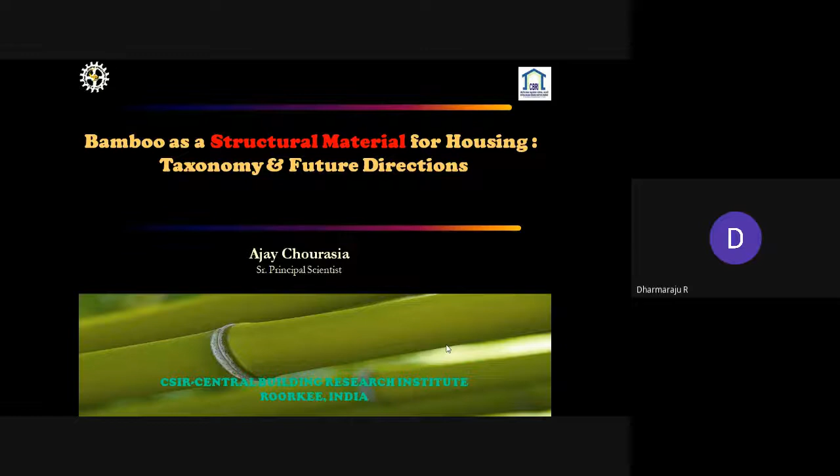So, it is my pleasant duty to discuss with you some of my experience regarding bamboo as a structural material for the housing sector, and I will be discussing its taxonomy and future directions. Because whenever discussing this kind of material, we have to think of scalability if we really want to promote this product in the housing sector.

Nowadays you must have heard a lot about different kinds of disasters happening all around the globe. During the rainy season you have drought, during heavy chilly weather conditions you have extremely hot weather, and wherever you expect a location is not subjected to rainfall or flooding, there you are finding flooding.

So these odd things are happening, and for that purpose expert groups all around the globe are focusing on climatic change. You must have come across the IPCC report of 2021, the Intergovernmental Panel on Climate Change. The first issue has been submitted and has quantified all these aspects, but they have not yet quantified or addressed how we can control these things and what measures need to be taken.

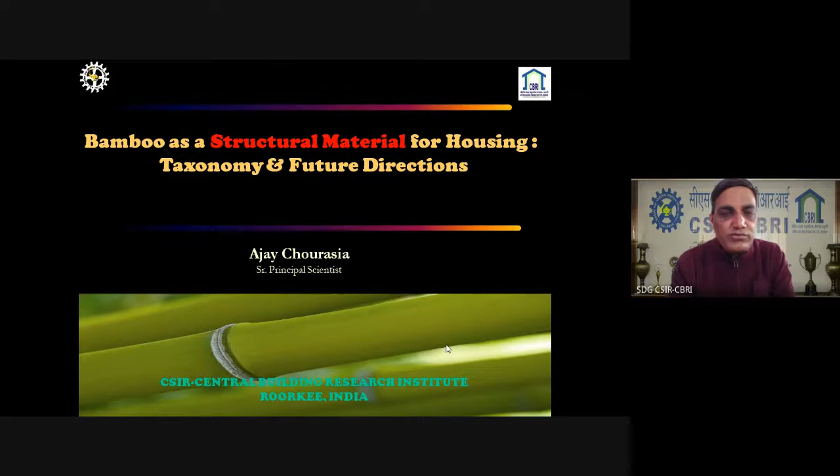In that context, this particular program is an ideal opportunity to bring to your notice that if we can promote bamboo, we can reduce the carbon footprint. At the same time we can generate a lot of economic and physical growth in day to day life, particularly helping the poorest of the poor people of our society.

As you know, bamboo is being widely used for different purposes. In the housing sector, it is being used as a complete building system or structural element like doors, panels, mats, or in the construction aspect it can be used as scaffold, and there are other different applications which are being widely used.

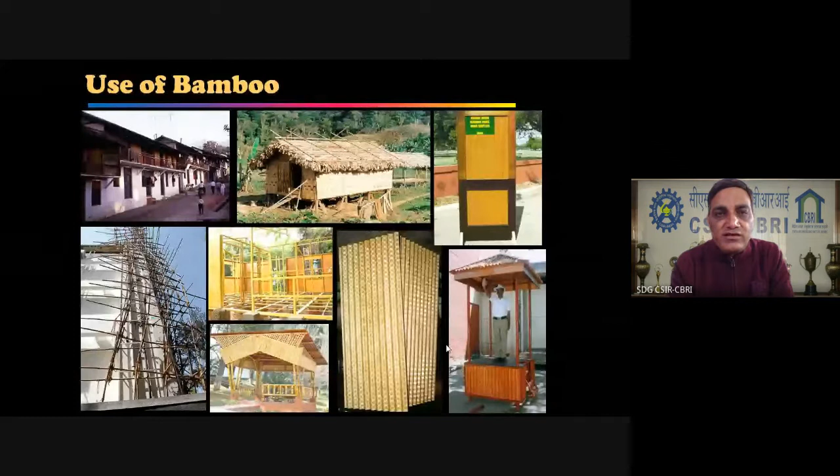But whatever we are using at the moment, we need to accelerate scalability, make it more scalable, and for that purpose we need to have a deeper understanding about this particular material so that we can take it to a higher level.

So before going into the structural aspect, I would like to draw your kind attention to the percentage of forest in our country, and how much contribution has been made by the forest in production of this bamboo.

We have 329 million hectares of land area, out of which 63.34 million hectares is notified as forest, which is around 19%. Among this 19%, 11% is dense forest, and the rest, 8.15%, is open forest and mangroves.

Out of this total 63.3 million hectares of land, 8.96 million hectares is basically utilized for production or cultivation of bamboo, in which around 67% is clump forms and 33% are non-clumping forms.

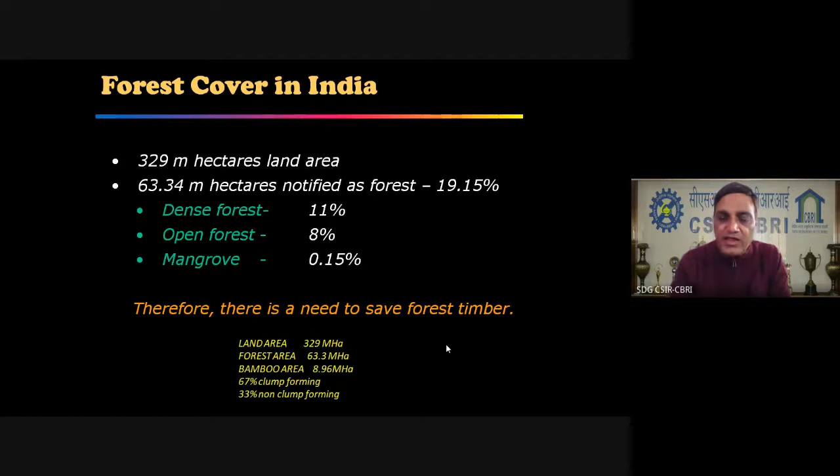Very good news is that India is the biggest producer of bamboo all around the globe, to the tune of around 45% across the globe.

Again, when you see bamboo, it basically addresses three major national concerns. First of all, ecological security. It not only conserves forest through timber substitution, but also can be used as an alternate material for non-biodegradable or high energy consuming materials like metals and plastics.

Apart from that, sustainable food security is also offered by means of bamboo, in which bamboo-based agroforestry systems can be promoted, which indirectly helps make the soil more fertile in and around the region. Apart from that, few people are consuming bamboo as pickle and for other purposes, so these are other food security benefits assured from bamboo.

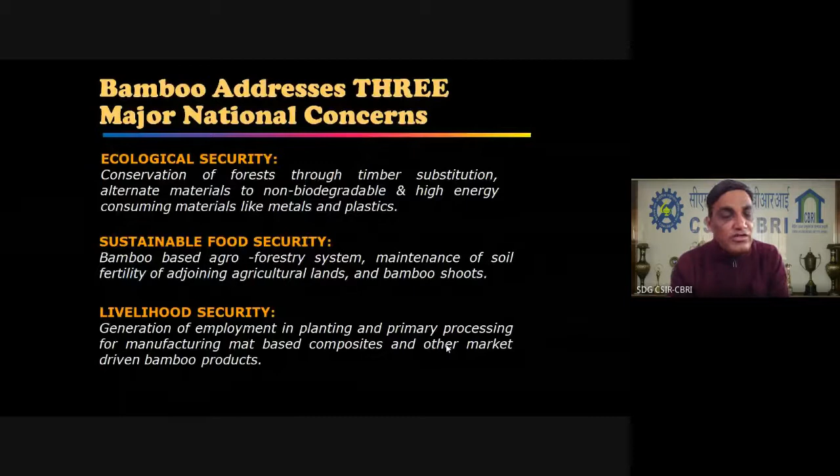When you talk about livelihood security, definitely when you are promoting the use of bamboo, you are developing more employment generation, basically in planting, primary processing, and manufacturing stages. So there are multi-manifold utilization benefits which you can gain out of bamboo.

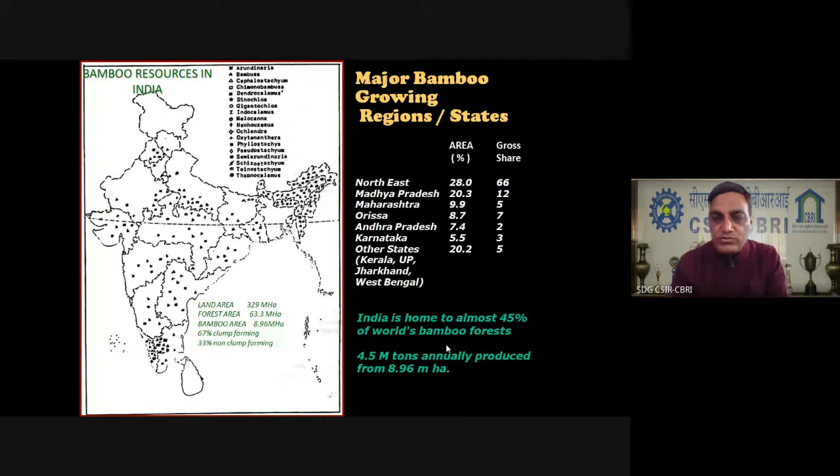As I mentioned earlier, India is home to almost 45% of world's bamboo production, in which 4.5 million tons are annually produced from 8.96 million hectares of land in our country. The seven sister states of Northeast have more contribution in production of bamboo, to the tune of 66% of total bamboo produced in our country.

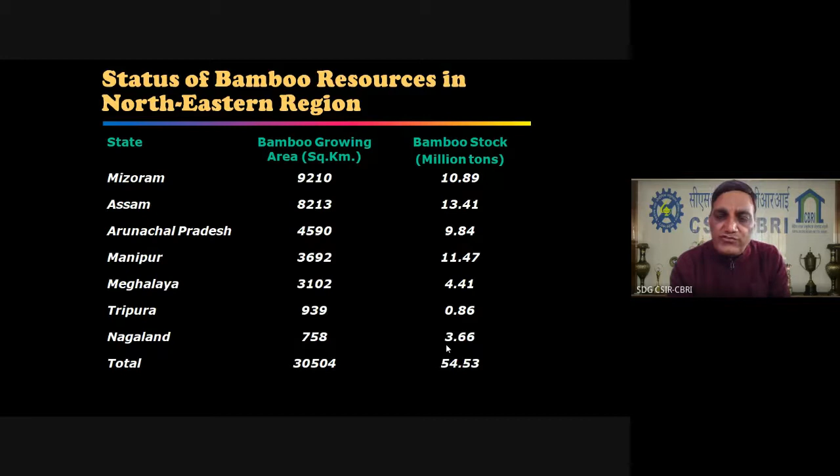When you see all these seven sister states, Assam, Mizoram, and Manipur are the leading states wherein the largest generation or cultivation of bamboo is happening. Importantly, good kinds of species are also being produced in these states.

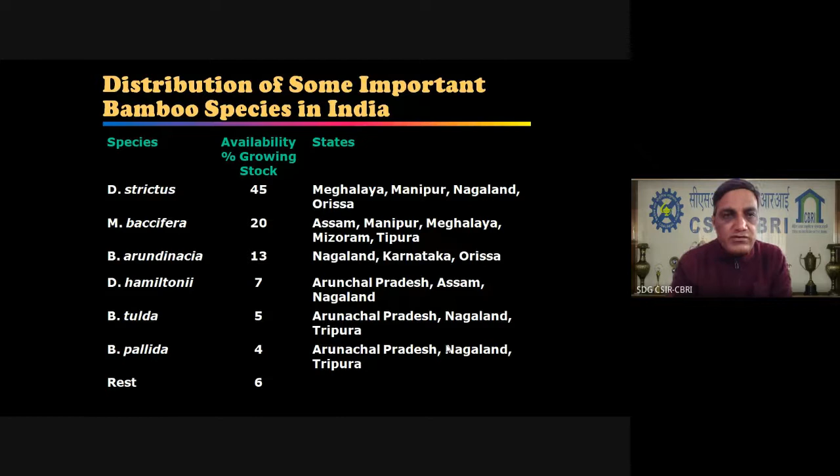Whatever bamboo we are producing in our country is being utilized for various purposes, mainly for pulp by the pulp and paper industries, housing, non-residential areas, rural uses, fuel, furniture, and several other sectors.

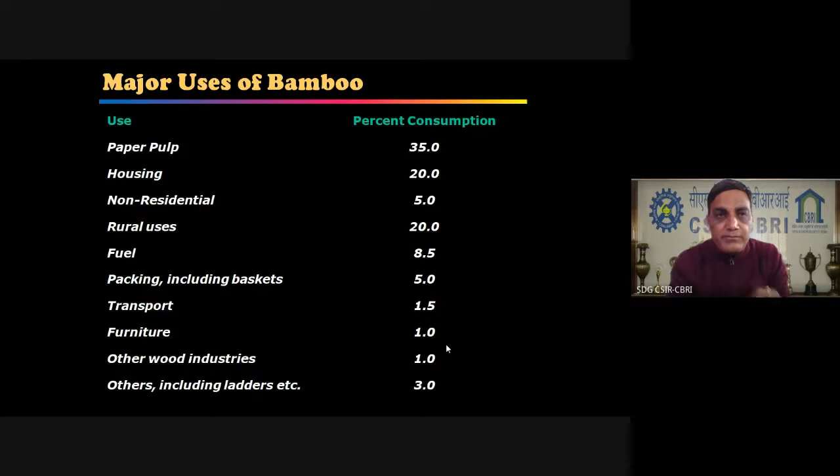In the construction sector, it is mainly being used for scaffolding. Now people are trying to utilize bamboo as bamboo reinforced concrete, as a replacement of reinforcement or mild steel or HYSD rebars. Apart from that, roofing, walling, and door window panels are being used.

Another promising or niche area to utilize bamboo in the housing sector is how we can make use of efficient connection joints in bamboo. The second is how we can effectively replace reinforcement by substitution with good quality bamboo, which can only be done after having a deeper understanding of its species and engineering properties.

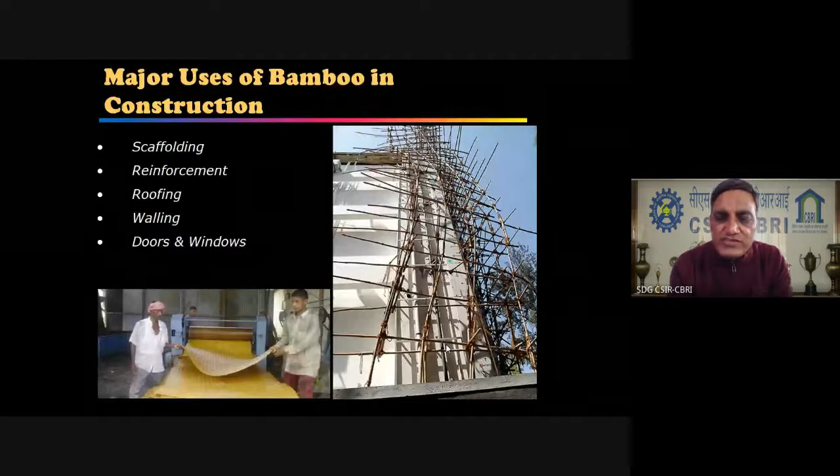Whenever you talk about the characteristics of bamboo, basically strength, straightness, lightness, and range and size are the basic features by which bamboos are categorized.

Categorization is generally done on these parameters, and one of the biggest advantages of bamboo is that whatever basic prerequisites are there for earthquake resistant design of any building system are inculcated in this material, mainly high strength to weight ratio. So it provides high strength and lightweight, lower in weight. That's why light structures get evolved and constructed when making use of bamboo, and that's a very good sign to resist higher magnitudes of earthquakes.

The next property is high cost ratio. When you compare the cost of reinforcement bar vis-a-vis bamboo, the cost is very, very minimal. That is again one of the promising aspects which promotes the use of bamboo.

Another issue is the high capacity to withstand repetitive loading, meaning fatigue loading whenever it is subjected to it. This is a much better material than any other in terms of repetitive loading resistance.

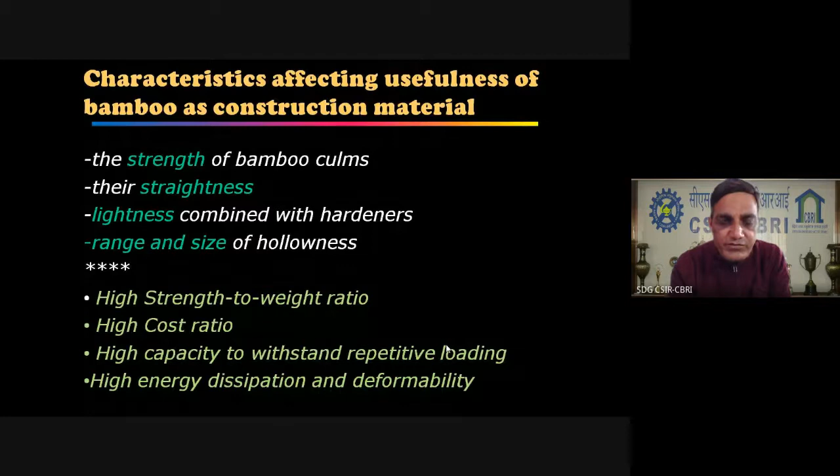Whenever you talk about excellent engineering properties in terms of seismic performance, people will talk about energy dissipation capacity or deformability. That again is being provided in an exceptionally good manner by bamboo. These are the four virtues which promote the utilization of bamboo in the housing sector.

When you talk about what species are generally being adopted or produced in our country, these are the 16 species which have been highlighted by our IS 15912, which is still at the draft stage. These are the 16 species predominantly available in our country, along with their corresponding properties in green condition and dry condition.

From a structural engineering point of view, you will definitely be interested to know what is the density, what is the modulus of rupture, what is the modulus of elasticity, and maximum compressive strength - these properties in terms of green state and when air dried.

When you look at all these properties tabulated in this slide after a great deal of research and material evaluation on different species, this shows that Bambusa auriculata is the best species contributing a high amount of compressive strength. Basically, across all these species, the compressive strength you are getting is in the range of around 35 MPa to 50 MPa, which is quite good or quite higher than conventionally used concrete.

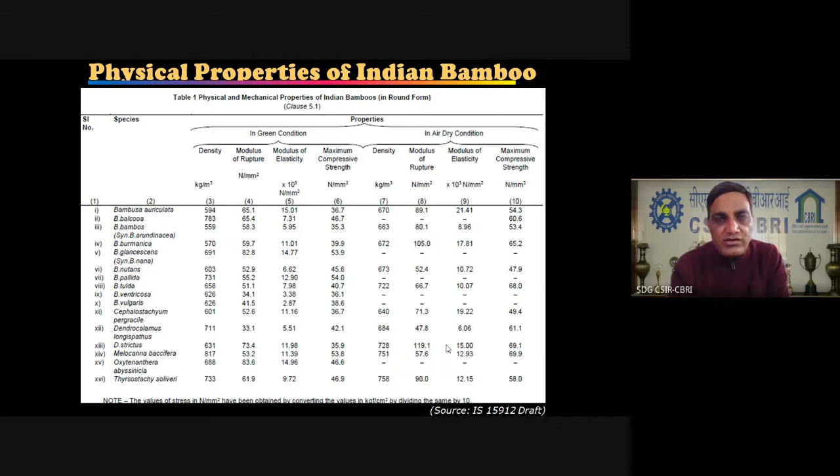At the same time, another important parameter which promotes the use of bamboo is based on the modulus of rupture. For the Bambusa auriculata species it is around 65.1 MPa, followed by Bambusa balcooa, where the corresponding figure is again 65.4, which again promotes the use of bamboo as a structural element in building systems. The density is basically hovering between 500 to 700 kg per meter cube. So these are the engineering properties which promote the use of bamboo in our building systems.

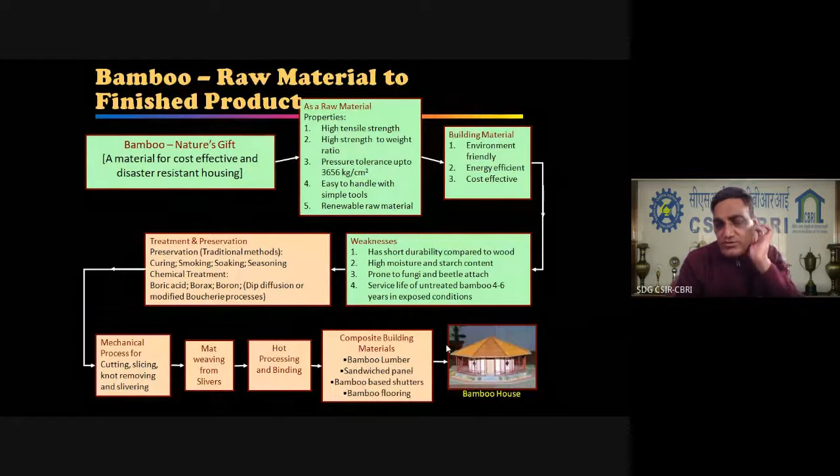When you talk about how bamboo is produced and brought to the finished product in terms of a building or building components, basically bamboo is nature's gift, and it is high time to adopt it as a raw material for construction of a building. The basic reason is its properties of high tensile strength and high strength to weight ratio.

It is having an excellent pressure tolerance up to 3600 kg per centimeter square. It is easy to handle with simple tools and can be handled by a semi-skilled person also. At the same time it gives good opportunity for local artisans as employment, and importantly, it is a renewable raw material.

So these are the properties which push forward this material as a raw material for construction of a building. The benefits of utilizing this material in building construction are that it is eco-friendly, high energy efficient, and cost effective. But it suffers limitations in terms of ductility, short durability compared to wood, high moisture and starch content, proneness to fungi, and service life limited to around 4 to 6 years.

So for that purpose, you need to do proper treatment. That again depends upon the condition in which it is exposed to weathering, and what species you are utilizing.

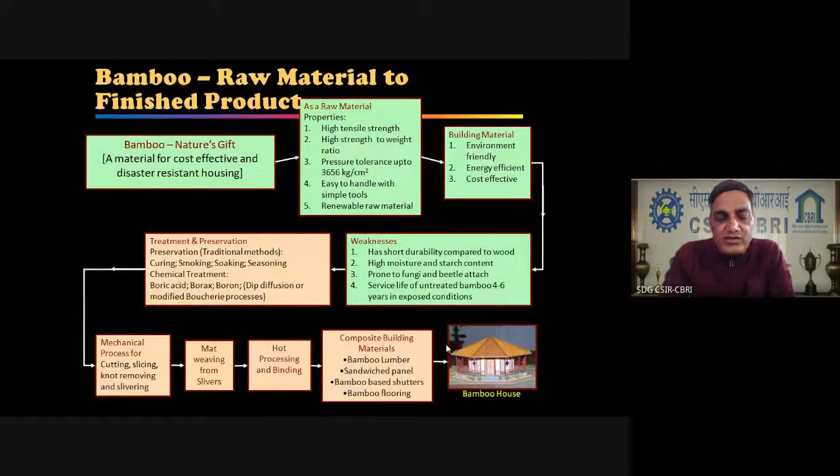So chemical treatment is recommended, and you can make use of any of these chemicals, with composition between 4 to 10% of the solution. Then for the mechanical process of cutting, slicing, knot removing and slivering, it is a very easy process, and because of all these properties you can make use of bamboo for different building components. So this is an ideal proposition.

When you talk about our understanding of bamboo as a structural element or material for different purposes, there is a wide range of Indian standards, ranging from IS 14588 to IS 15476. But from a structural point of view, you have to refer to IS 15912:2017, which is still at the draft stage, but which focuses on the mechanical and engineering properties and different gradings depending upon the different species.

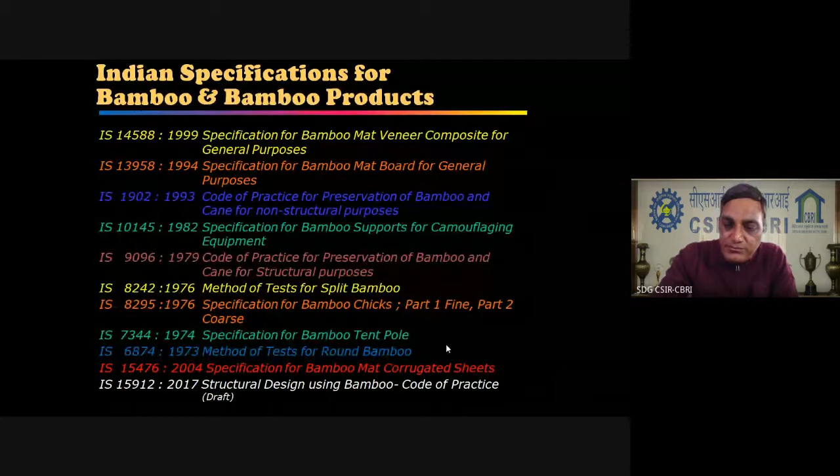To have more insight into this aspect, we have to see what makes bamboo a weak entity. That is basically attack of fungi, and for that purpose you have to go for proper treatment, which needs to be carried out during green conditions. Detailed methodologies and proportions can be referred from IS 9096:2006.

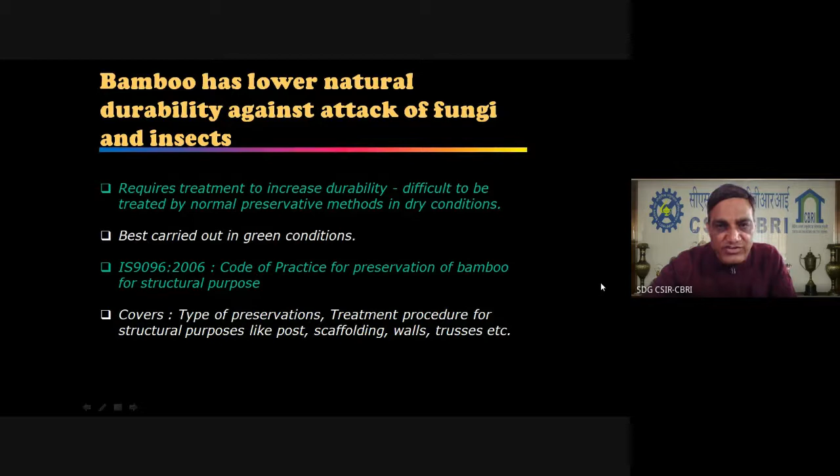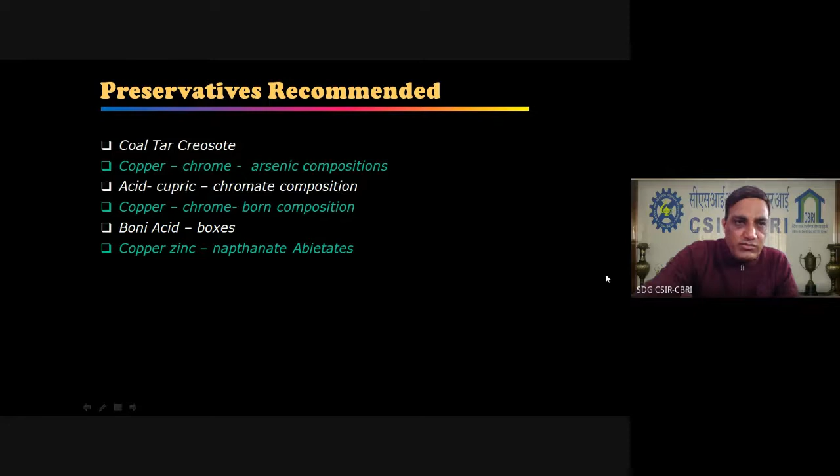But definitely from a structural point of view you have to look at it from the durability perspective. When you are talking about preservation, coal tar, copper, acid cupric, copper or boric acid -- these are the different chemicals you can make use of for the treatment.

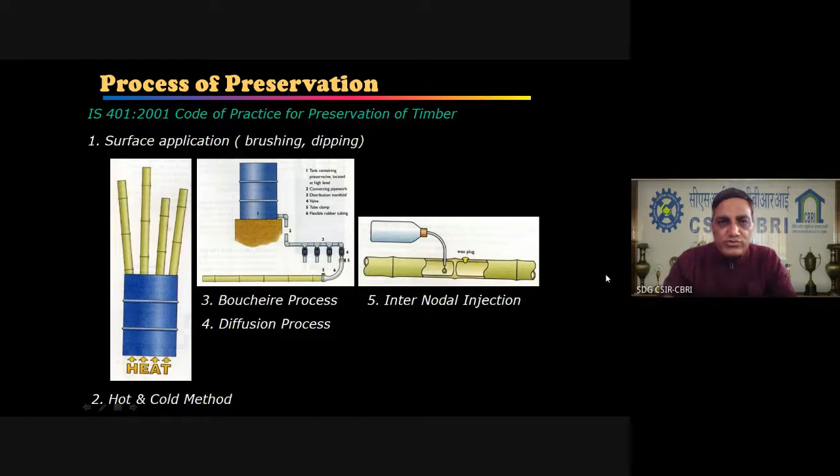Broadly, the treatment process or process of preservation encompasses first of all the surface application, in which the mixed solution is kept in a tank, and then it is supplied to a manifold by means of a connecting pipe. The manifold is connected with different valves, and these valves are indirectly connected to the bamboo which needs to be treated. Due to gravity, the chemical mix enters the bamboo through the nozzle, and thus the diffusion process takes place.

This can be done by the hot and cold method. But from the structural point of view, you can refer to the National Building Code 2016 Part 6, Structural Design, in which you have to go for Section 3, focusing on timber and bamboo.

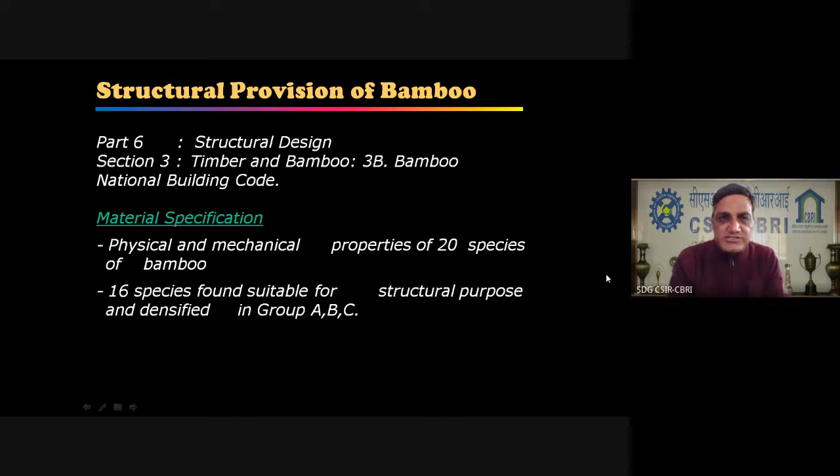Section 3B is dedicated to bamboo as a structural element for building construction, in which it clearly categorizes 20 species, whereas our code refers to around 16 species, further classified into groups A, B, and C, depending on modulus of rupture, modulus of elasticity, and compressive strength.

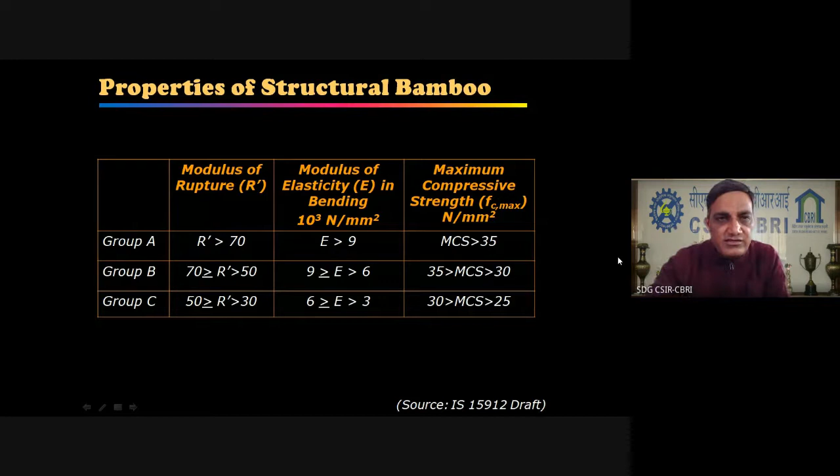This is the classification generally followed for classifying different species into groups A, B, and C. Whenever the modulus of rupture is more than 70, E is more than 9, and maximum compressive strength is more than 35, it is said to be group A, which is excellent quality of bamboo.

This classification further permits the safe permissible stresses whenever dealing with engineering design as a structural element. Permissible stresses are limited for different species, and for that purpose the stresses needed are extreme fiber stress, modulus of elasticity, and allowable compressive stress.

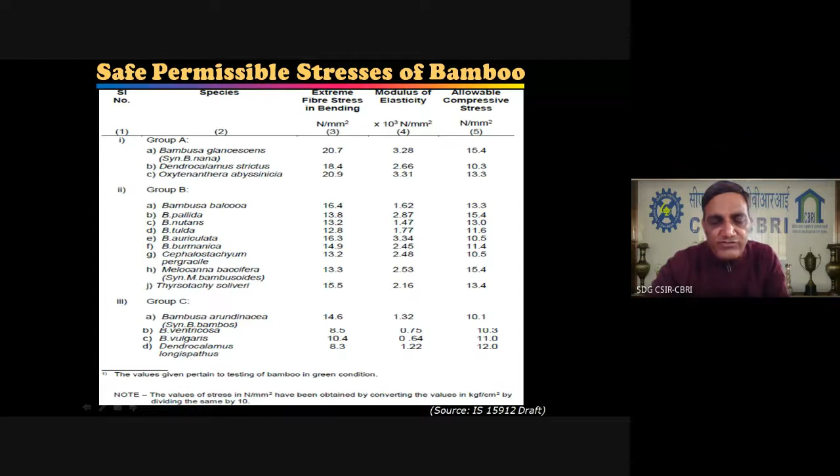This is again tabulated in this particular draft code of IS 15912.

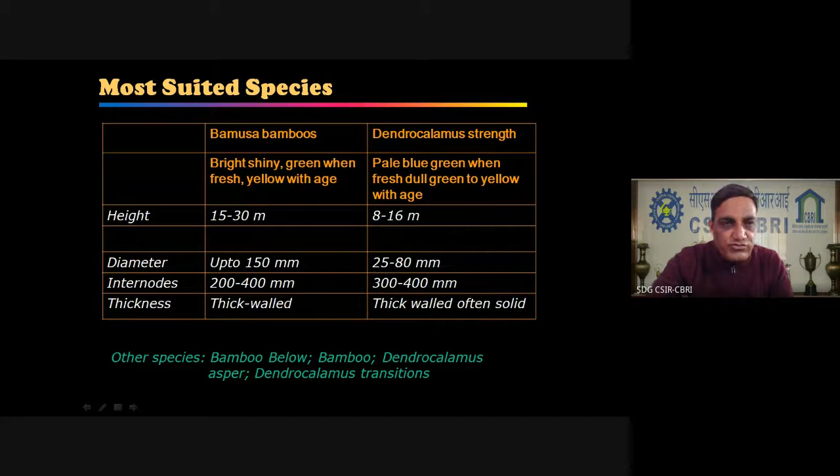Thickness is very important, so you have to limit the thickness of bamboo wall to a minimum of 8 mm. One has to be very careful about this. Height varies from species to species, diameter also varies, and internode length also varies.

When you see the different gradings of bamboo structural system, it depends upon diameter, length, taper of the culm, straightness, internodal length, wall thickness, density and strength, and durability and seasoning. These are the important parameters which classify bamboo into different grades.

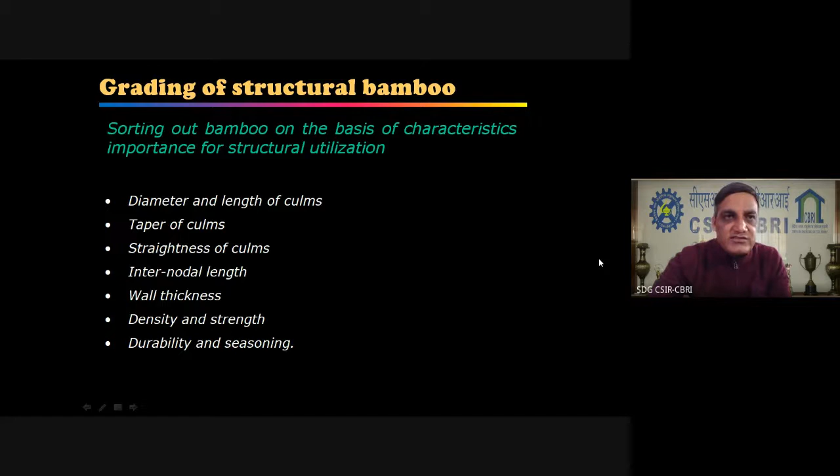When you name it group A and group B, further classification is done as special grade, grade 1, 2, and 3, depending mainly on the diameter of the bamboo. 70 to 100 mm is referred to as special grade, grade 1 ranges from 50 mm to 70 mm, grade 2 is between 30 to 50 mm, and grade 3 is less than 30 mm.

An important aspect in terms of taper is that it should not be more than 5.8 mm per meter. When you talk about curvature, the maximum curvature should not be more than 75 mm in length for a given length of 6 meters, for any grade of bamboo.

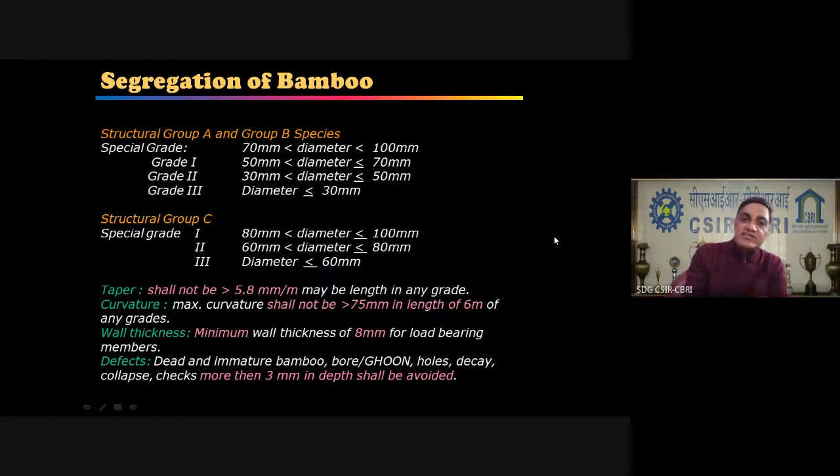Wall thickness, as mentioned earlier, is expected to be a minimum of 8 mm, whereas defects have to be looked into for more than 3 mm depth from the outer shell.

After understanding the different classifications, species, grades, and engineering properties, now we will come to the structural system - how we can connect different elements of a structural system with each other.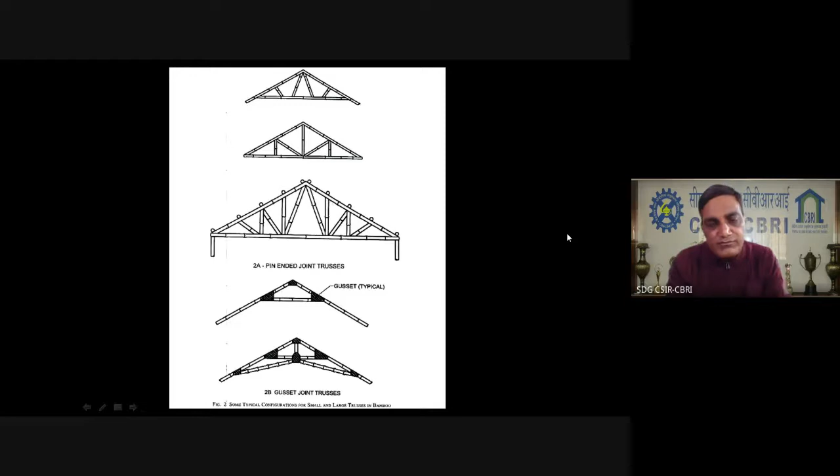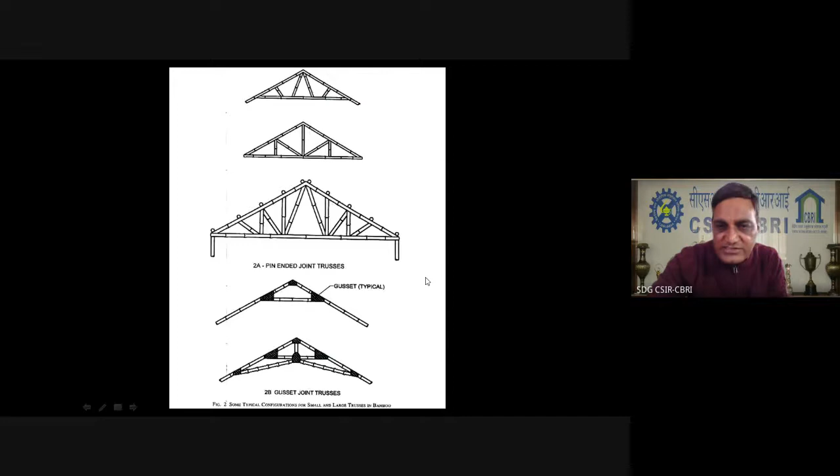To begin with, if we are making use of bamboo for trusses, pin jointed connections are predominantly used, or otherwise you can make use of a gusset by means of an MS 3 mm plate. You can connect two different bamboo elements as per the required design to meet out the structural system. This is about the joint.

Now the connection between two bamboo units could be either lapped or butted. When focusing on lap joints in bamboo, that can be done in three alternative ways. One is the full lap splice joint.

Alternatively, for a similar diameter of bamboo, you can cut it in a rectangular shape like a tongue and groove system, and after it is overlapped, you can connect these two bamboos by means of bolts.

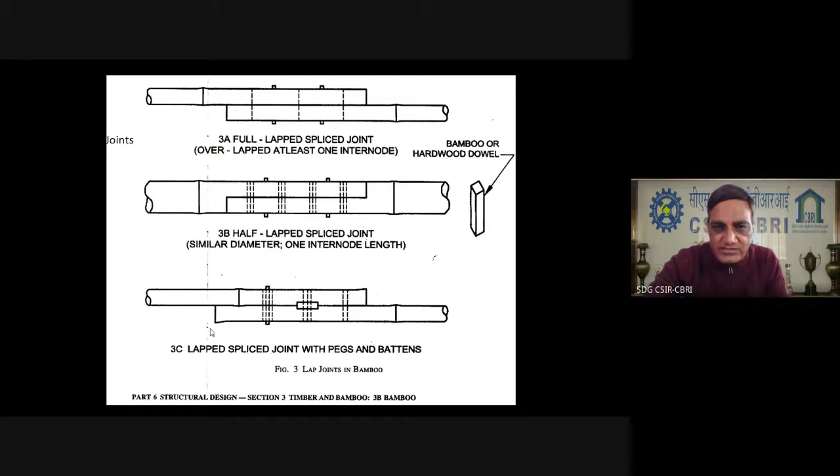The third type is the lapped splice joint with pegs and battens, in which after lapping, holes are drilled and then pins or pegs are inserted, or otherwise it can be wrapped or tightened using strips or steel GI wires.

Further jointing can be done, as we have just seen with lap joints. Now as regards the butt joint with side plate in bamboo, two bamboo units are joined end to end, and over these two jointing elements, dowels or pins are placed.

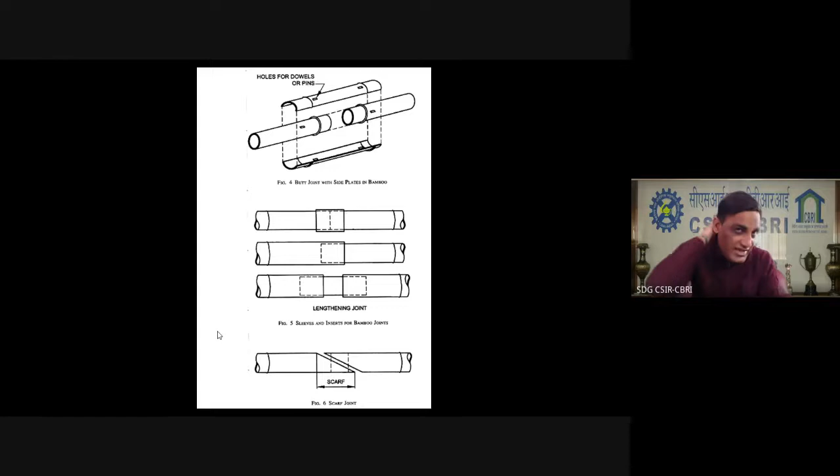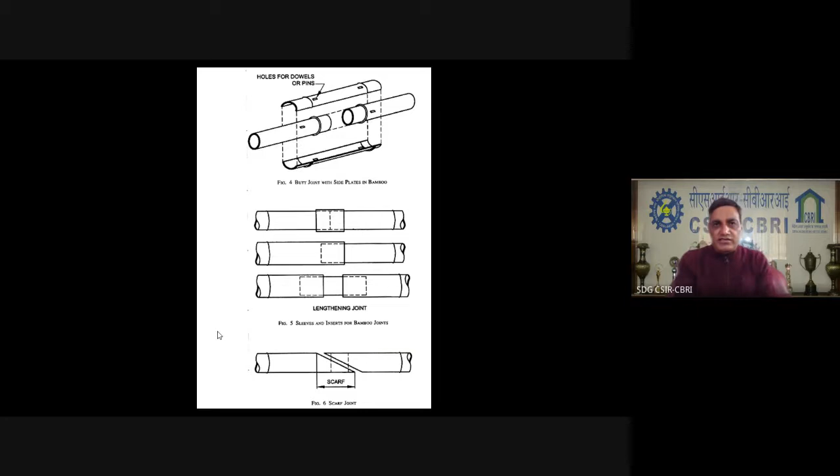This can be encircled by a sharply cut bamboo having a slightly higher diameter, covering the entire circumferential area of the bamboo to be connected. Through these holes, you can insert a pin or bolt and tighten it. Another approach could be sleeve and inserts for bamboo joints, or the scarf joint.

In the scarf joint, you connect the two bamboos instead of with a 90 degree end-to-end connection. The bamboos are cut at an angle of around 40 to 60 degrees inclination, and then they can be connected with each other at this scarf portion, tightened by means of a pin or bolt.

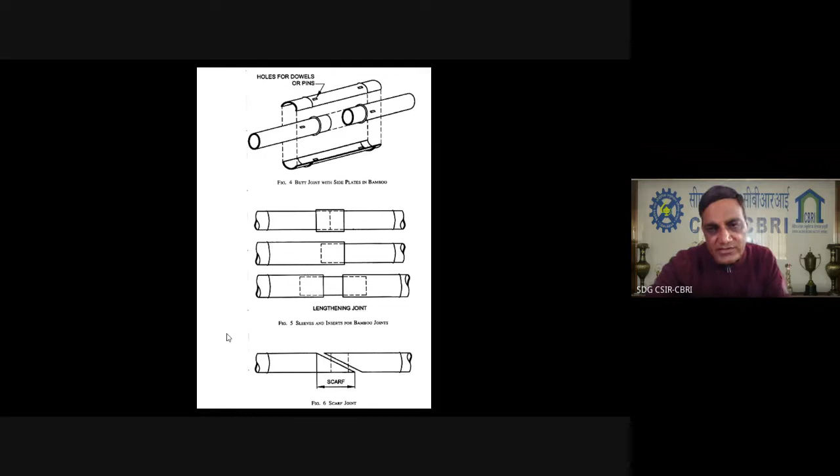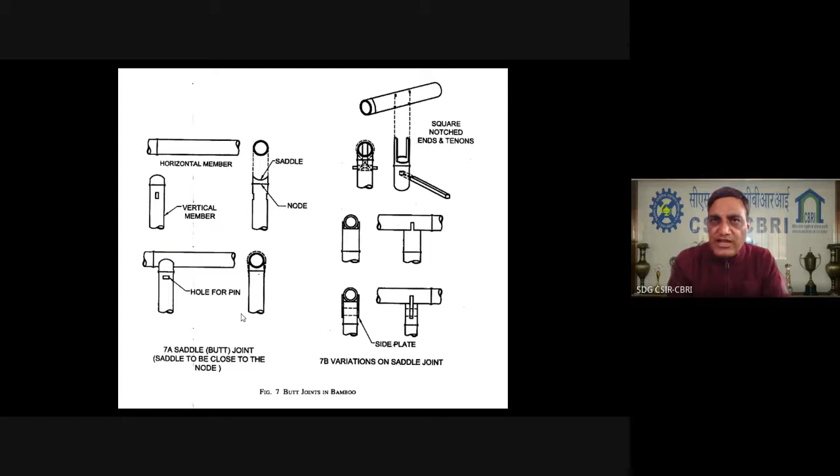When you have two different sizes of bamboo, particularly when using a bamboo as a vertical element with larger diameter supporting a bamboo with a smaller diameter, you can cut a square notch at the end and the tenon, where the truss or rafters can sit, and then it can be connected.

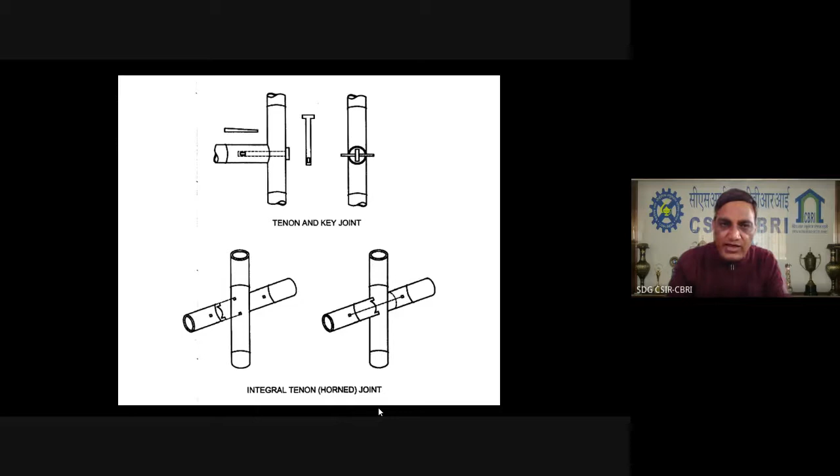This kind of variation on the saddle joint detailing is shown here. At this point of detailing, these two different elements can be connected by means of a tenon and key joint, and an integral tenon or horn kind of joint, where again the connection is done by means of a pin.

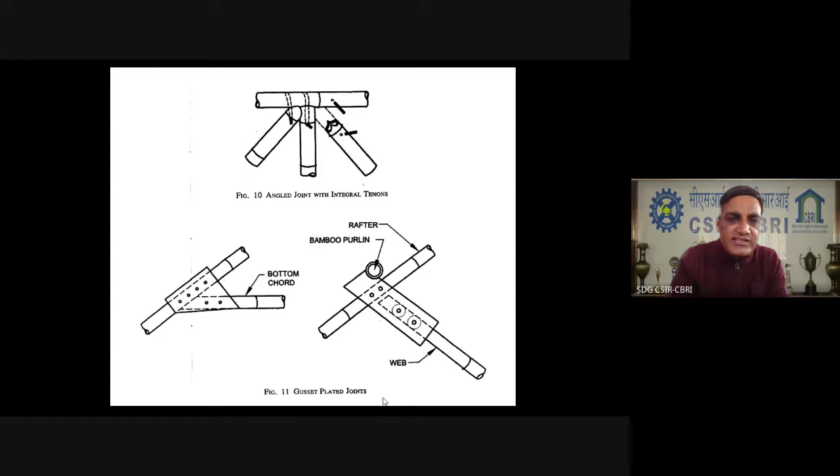Rafter connections can also be done in a similar fashion, but interestingly, when utilizing gusset plates, you have to ensure you create a slit into the bamboo, and through that slit you insert the gusset plate.

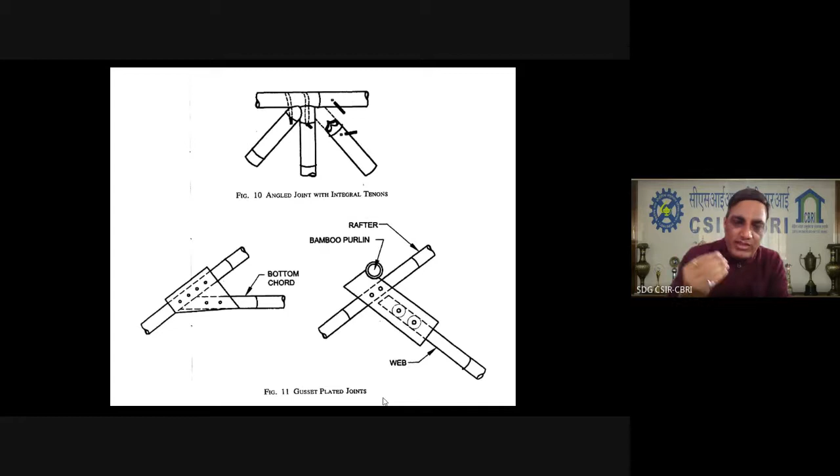Normally a 2.4 to 3.2 mm thick gusset plate or MS plate is adequate for making this insert and connecting two different chords made from the bamboo. Subsequently, the connections are achieved through these gusset plates.

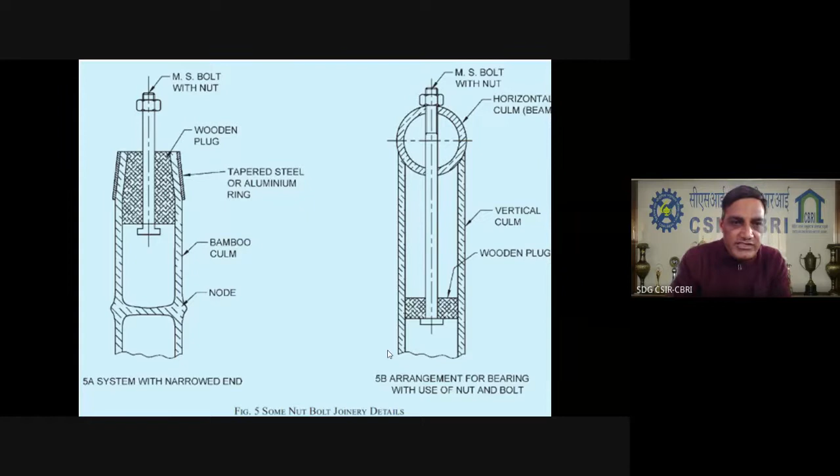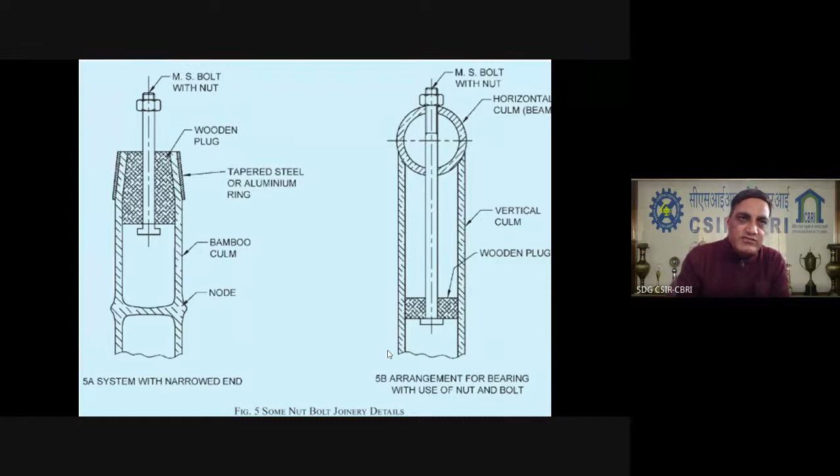Another innovative way of connecting bamboo is by means of a nut and bolt, where the first option is the system with the narrowed end. Here, the bamboo is cleared and plugged with a wooden plug, and once it is plugged in tightly, it is further encased by means of an aluminium or steel ring so that it is adequately tightened, and it could be an integral part of bamboo walls. Afterwards, the MS bolt is inserted, providing a good connection between the two different bamboo elements.

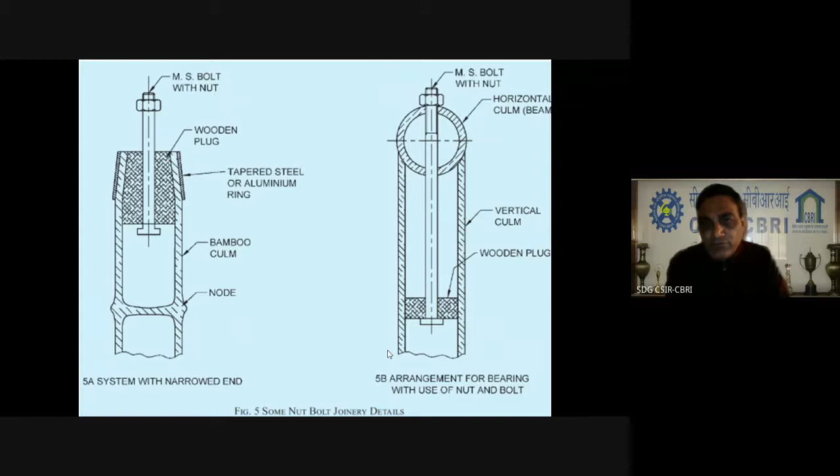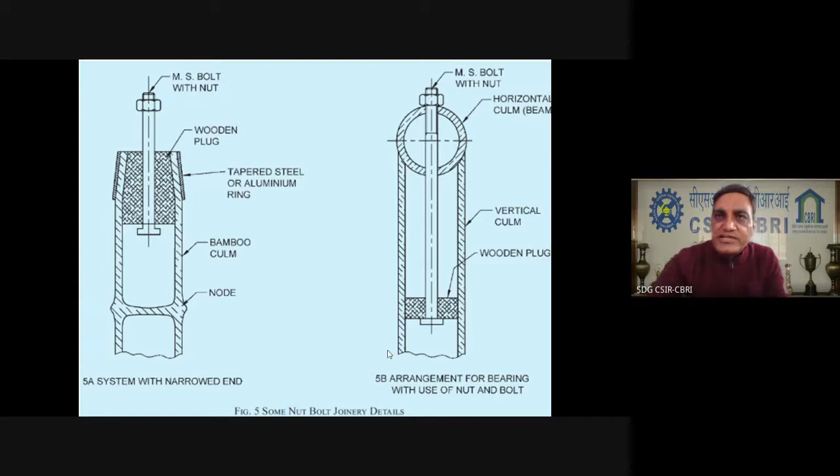Another alternative way of arranging the bearing arrangement with nut and bolt is when you have a requirement for deeper or larger load transformation. In that case, you have to insert the wooden plug slightly deeper into the bamboo, and thereafter you can connect the two different horizontal elements.

Till now we have seen bamboo connected at different elemental levels in the superstructure, but it's also interesting to know how we can connect this bamboo with the foundation or substructure. In such cases, the foundation predominantly makes use of concrete elements or masonry.

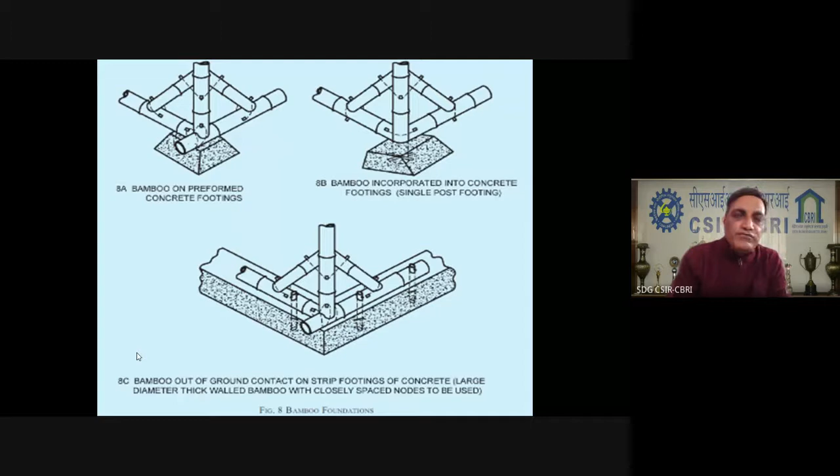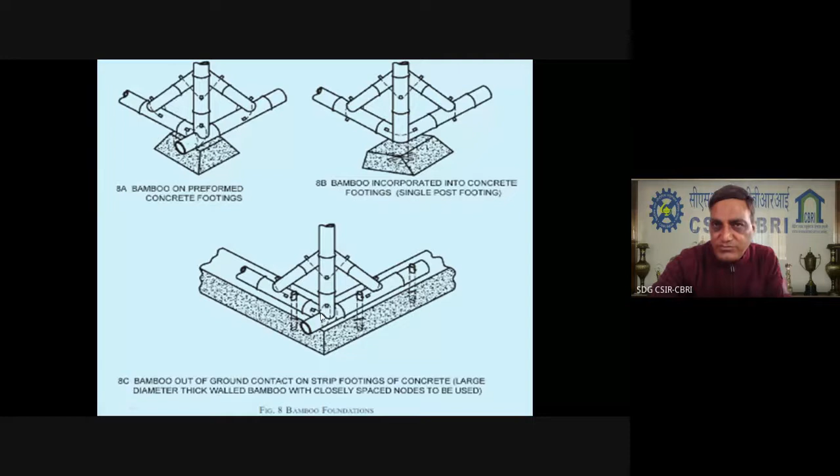You have to ensure that once the bamboo connections are made, it can be provided with a pin or plug, and then with inserts, MS rods, with embedment depth into the masonry or concrete to the tune of minimum 20 times the diameter of the bar, whatever diameter you are using, 8mm or 10mm, as a bolting mechanism to connect it to the substructure. These are the different alternatives you can adopt to connect the superstructure made from bamboo to the substructure to have good integrity.

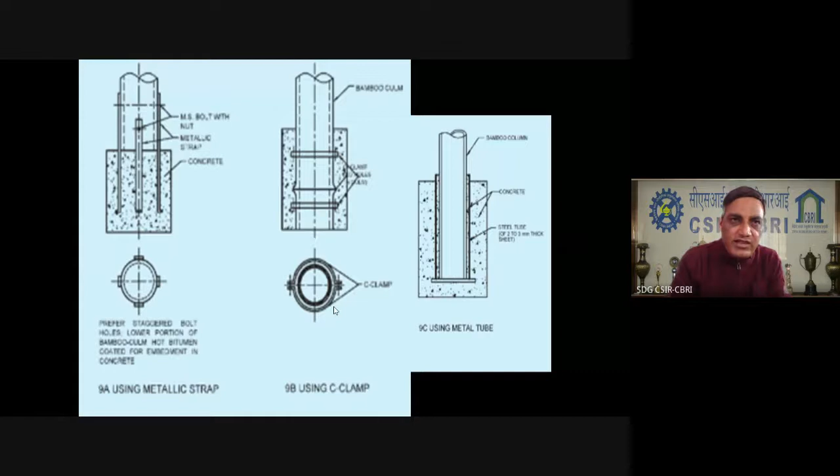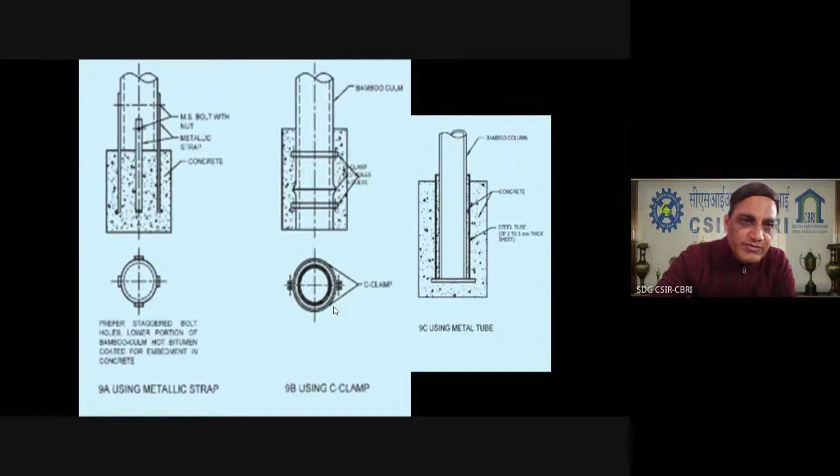Another approach could be to connect the foundations with the superstructure by means of a metallic strap. This metallic strap could be an MS flat, maybe 3 to 4mm thick, provided at the periphery and adequately bolted to the bamboo. Anchorage is done by the MS flats, and bolts are used to connect this MS flat with the bamboo. This is how embedment is done into the concrete by means of this MS flat, provided at all corners, perpendicular, 4 times, and then inserted into the concrete.

An alternative way is that it can be provided with a C clamp. This kind of clamp basically tightens the bamboo into the concrete, and this clamp is provided with a protruded portion which ensures good anchorage between the concrete and the bamboo, making an interface to get more strength.

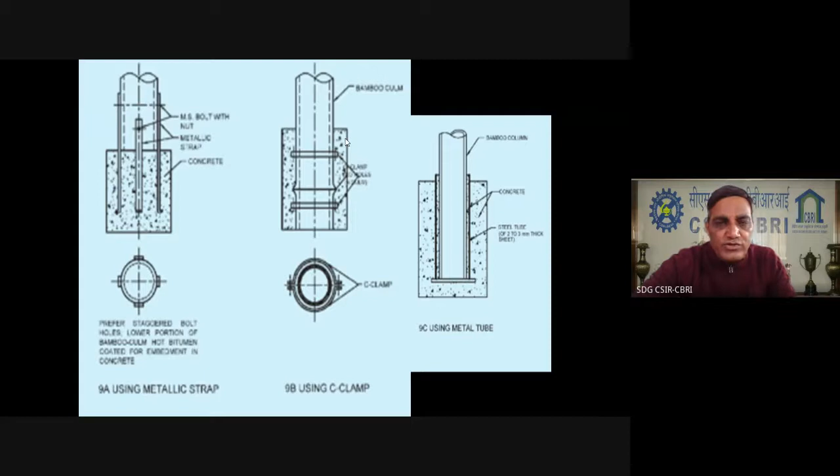When you talk about tensile stress, it ranges up to 158 kgf/cm². For compressive strength, it depends on the given species, so you can pick up, based on your species, these different strength characteristic properties for the design.

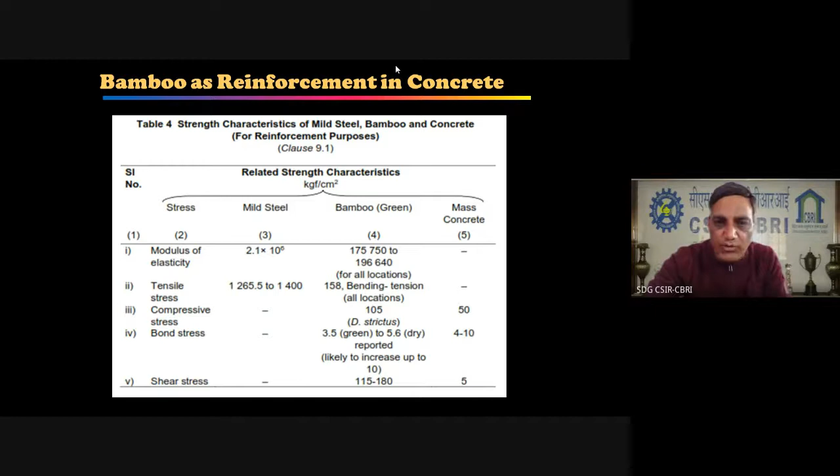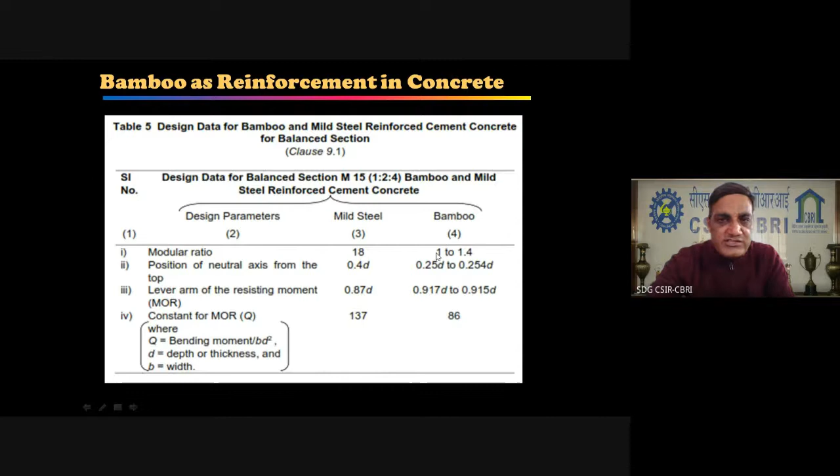When dealing with design, the data you further require is in terms of modular ratio, position of neutral axis from the top, lever arm for resisting the moment, and the constants for moment of resistance, Q, depending on depth and width. These ranges are given here for bamboo: modular ratio can be taken in the range of 1 to 1.4; position of neutral axis from the top could range around 1/4 of D, that is 0.25D, where D is the effective depth of the structural element; lever arm of the resisting moment could be 0.917 to 0.915D; and the constant for moment of resistance Q can be considered as 86. These are the very important figures which can be considered while designing bamboo reinforced concrete elements.

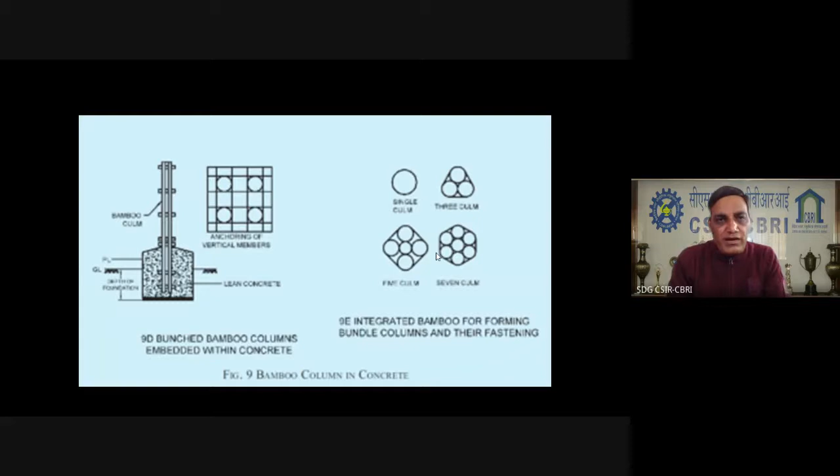When making use of bamboo as a structural element, particularly a vertical load carrying element, you can use a single bamboo if you have a good, reasonable diameter and good species. Otherwise, if your load requirement is higher, you can club the bamboo as one piece, 3 piece, 5 or 7, as shown in this slide, integrating bamboo to form a bundle of columns and their fastening. This depends upon how much axial or lateral load you are aiming for, and accordingly you combine or bunch different diameters of bamboo together, connecting them by means of bolt or pin connections, or by means of a steel or GI sheet.

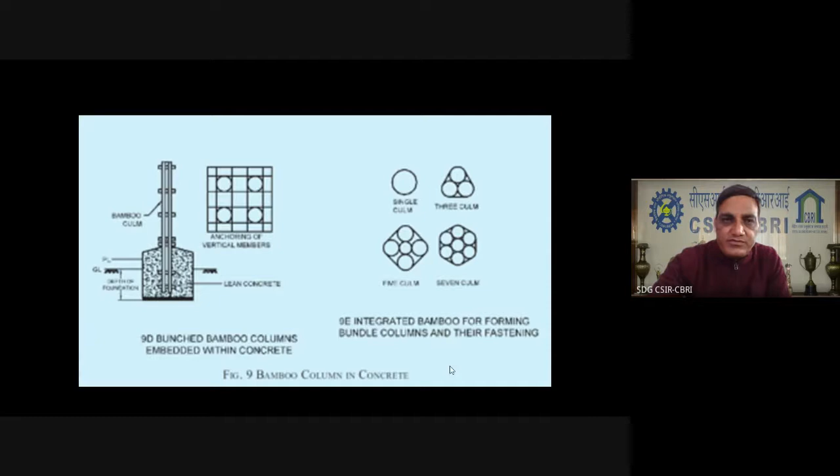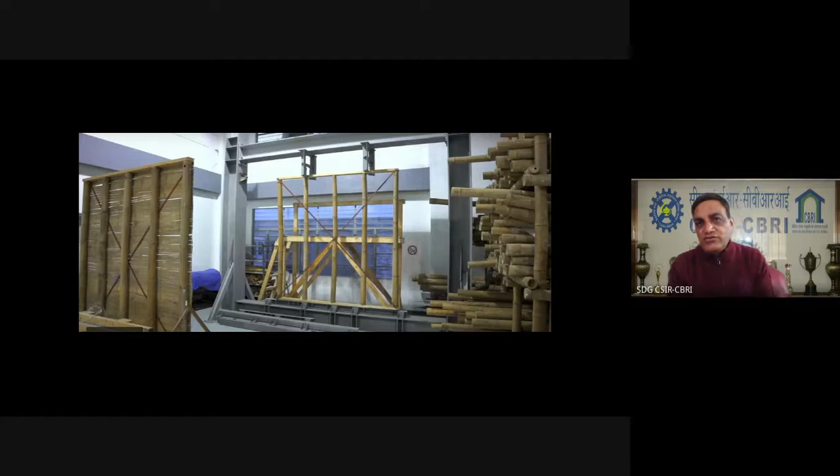When you are making use of bamboo as only a vertical element, that is fine, and we are aware that bamboo is very good in resisting axial loads. But sometimes when using it as a structural system, you need adequate lateral resistance apart from ductility and deformability. In that case, in addition to connecting this bamboo vertically and bracing it horizontally, it is good practice to provide diagonal braces by means of an MS strap. That MS strap width again depends upon the size or span of your wall. So now I'm trying to use these bamboo reinforced structural walls.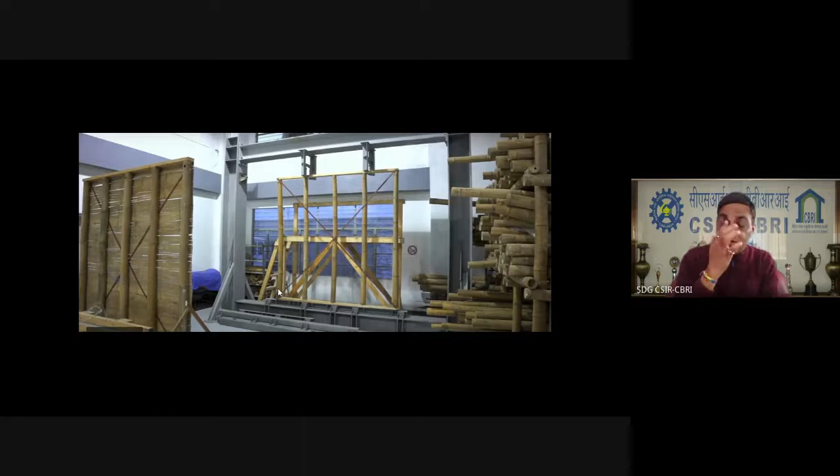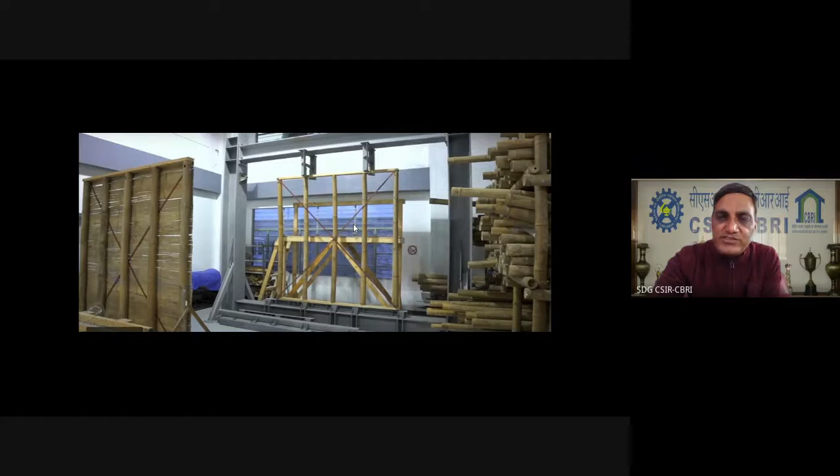To achieve better lateral load resistance, you can provide 25 to 50 wide ISF, Indian Standard Flat sections, having a thickness of 3.2 or 3.5 depending on the size of the panel, connected diagonally as you can see in this figure. This definitely provides excellent lateral load resistance and further improves the lateral load resistance capacity of the structural system when making use of bamboo. These are the different connection systems you can see to achieve this better performance.

This is basically a bolting system. First, you have to drill the hole and then connect these two different elements of the bamboo by means of either a bolt or steel or galvanized wires.

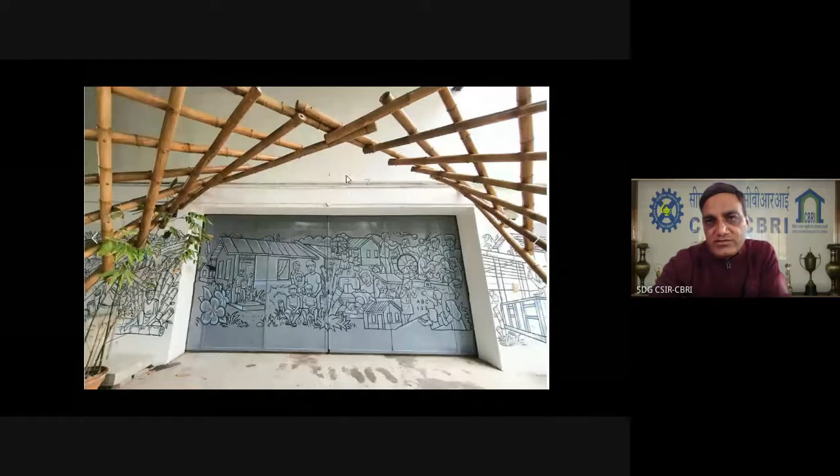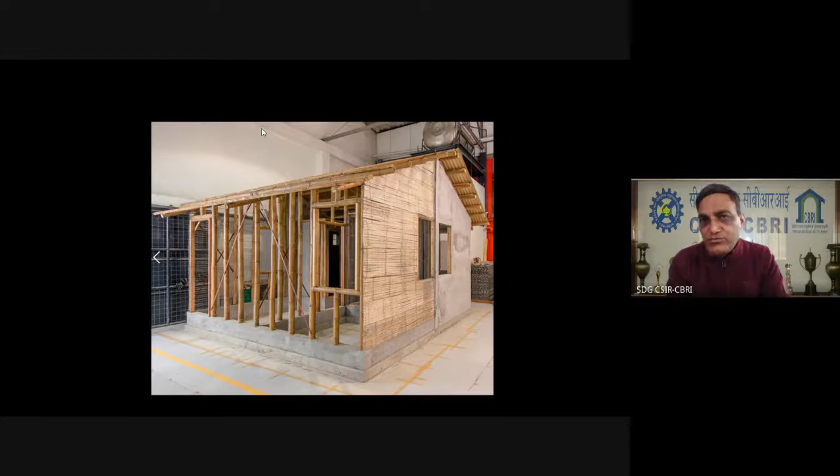So now, when you look into the different kinds of bamboo, these different approaches, when you are doing them, only then will you be able to increase and improve the deformation capacity of the bamboo, in addition to whatever properties it already has. So one thing is very clear: bamboo has excellent properties in terms of seismic resistance, but you can further improve these properties when making use of this material as a structural system.

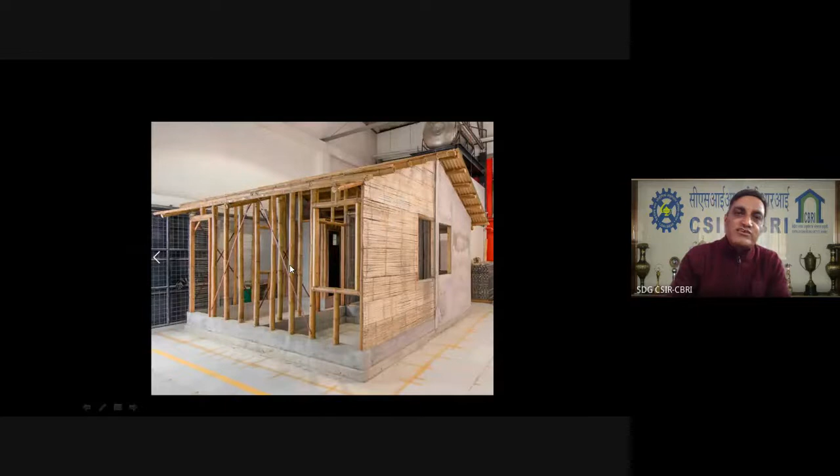Hardly anyone is using this, but we need to promote these techniques so that further improvised design solutions can be developed. One thing is very sure: all these technologies - joints, species - have been tested, but different joints and connection systems as structural systems, while looking very good and promising, definitely need to be tested in the laboratory. Only then can confidence and actual design procedures be worked out.

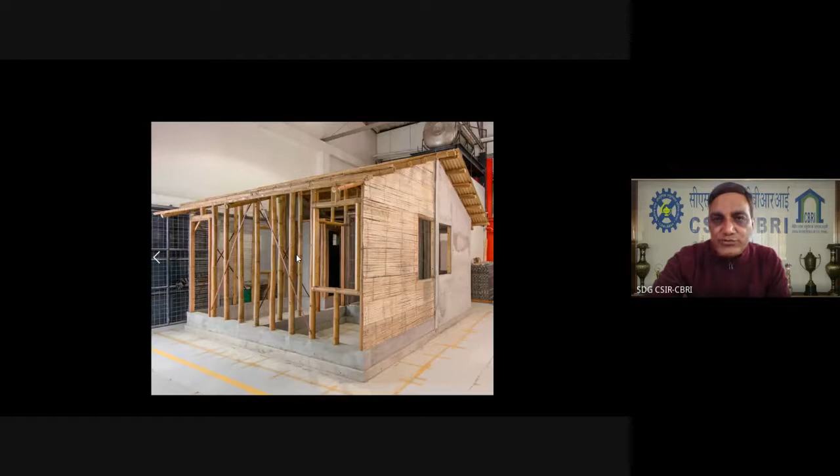By now, there are no specific guidelines for design of bamboo as a structural system, so that needs to be worked out, and for that purpose a greater deal of research and introspection into its structural properties is required. Our goal is to share knowledge on bamboo housing construction practices and encourage bamboo construction technology at a system level, not just as a non-structural building element but as a structural element, and to develop guidelines and technical resources for improving bamboo construction.

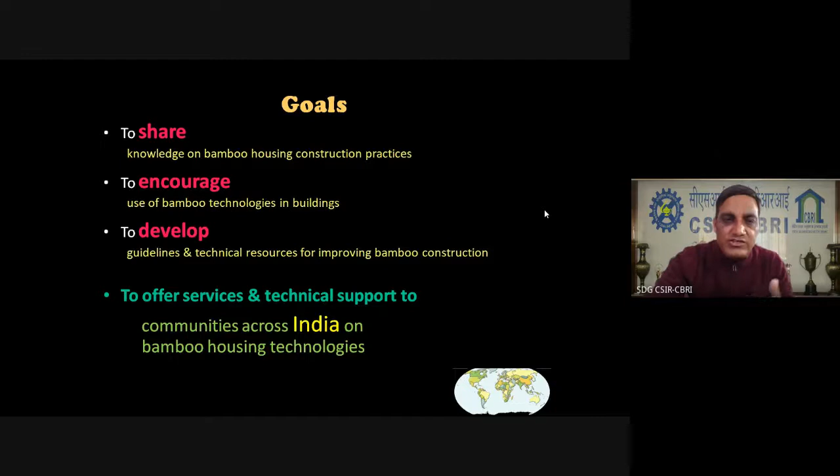For that purpose, detailed R&D is required from a structural engineering point of view, and this is being done at our institute, CBRI. Our further goal is to offer services and technical support to communities across the country for improving and scaling the use of bamboo as a structural system. These are our focus areas of research to promote the use of bamboo in buildings, building systems, or housing systems to meet the aspirations of society.

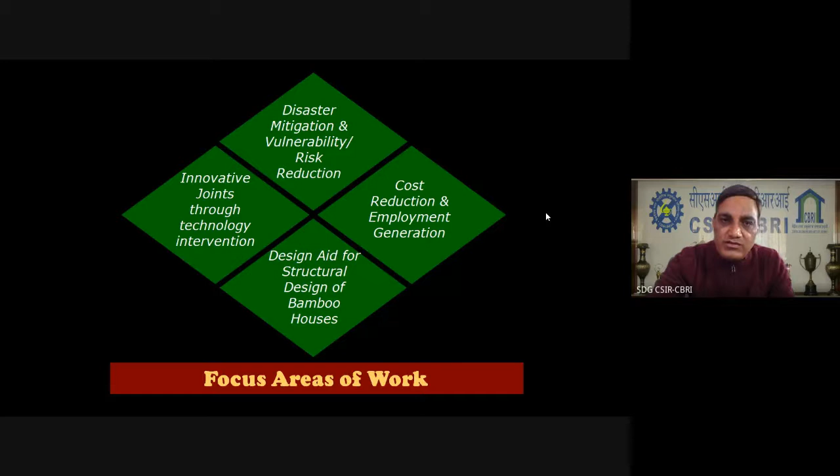Ultimately, we are aiming to develop a design aid for structural design, particularly for housing, using bamboo as a system. For this, we need to work on innovative joints, and once the joints are innovative, they should be executable at site. But before taking it to the site, it needs to be tested at full scale. Then we have to work out very simplified structural design solutions which can be carried out by a common man. All these things will be done very shortly at our institute.

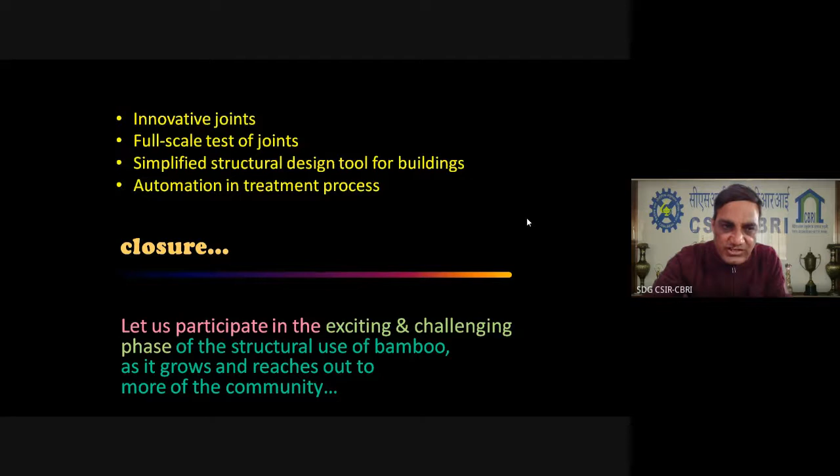Let us, at this point in time, participate in the exciting and challenging phase of bamboo as a structural system, its structural use, and its growth, reaching out to more of the community.